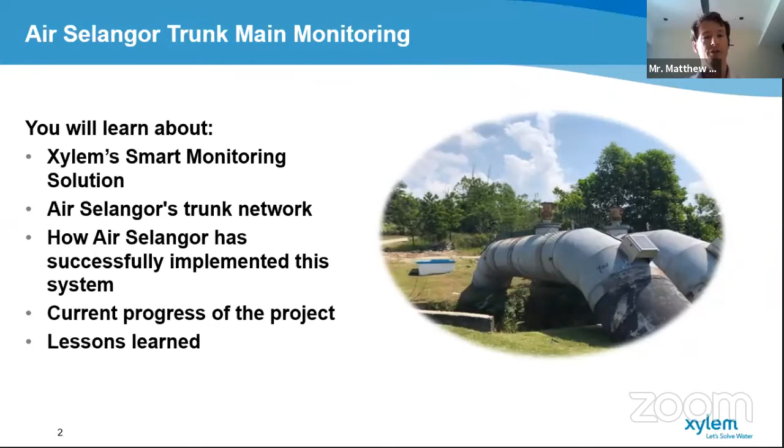So to initially take you through the solutions that we are providing here, Xylem provides a number of network analytics solutions relevant here. These cover 3 key products that we call View, LeakView, and SurgeView. The purpose of these products is to assist with decision support, NRW reporting.

24/7 leak monitoring and alerts, and asset failure prediction through the monitoring of damaging surges within the pipes. So these products are also supported by our own hardware, which you can see here. This constitutes a remote terminal unit, a pressure sensor, and an acoustic sensor. The RTU itself can also be used with flow meters and other types of sensors, and can be powered with a number of different power sources.

But the key part here is the pressure sensor, which is capable of recording up to 256 readings per second. This facilitates the transient monitoring that I've just mentioned. And the hydrophone also forms a key part of the solution here.

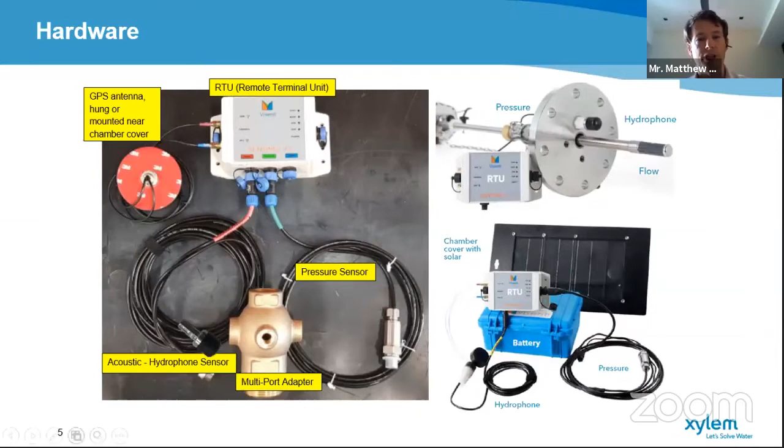So you can see this perhaps on the next slide. The hydrophones and the pressure sensors both form a key part of the solution. So when a burst occurs on a pipe, it can initiate very suddenly, resulting in a drop in pressure, which we refer to as a transient. This sudden drop in pressure can travel along the pipeline at high speed and for long distances, but can only be picked up with very high resolution recording of pressure. Typical pressure monitoring devices wouldn't detect this type of signal. So for this reason, we use the pressure sensors.

However, not all leaks occur as bursts. They may start small and grow over time. And these types of leaks might be recordable using hydrophones, which require closer spacing.

So by using, sorry, I need to interrupt you, I think we cannot hear you very well. You seem to be breaking up. I'm not sure if it's your internet connection or your speakers, try again. Just give me one minute.

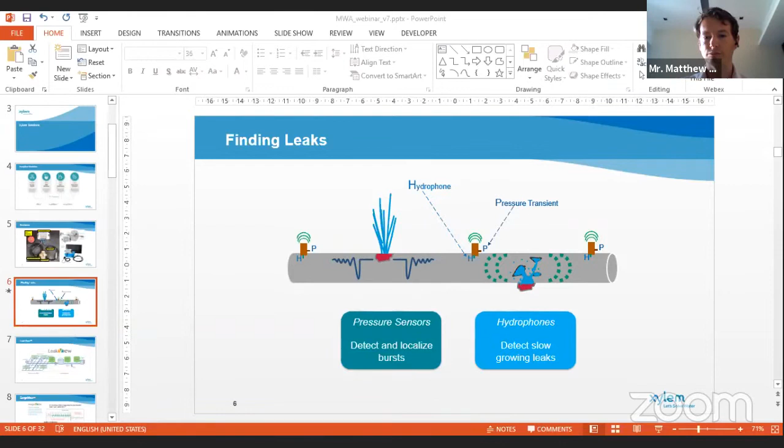Okay, can you hear me now? Yes, much better, thank you. Okay, please step in if I'm mumbling.

Okay, so to recap, we use those 2 different types of sensors, the pressure sensors and the hydrophones, to detect leaks in the different manners that they may occur on the pipes.

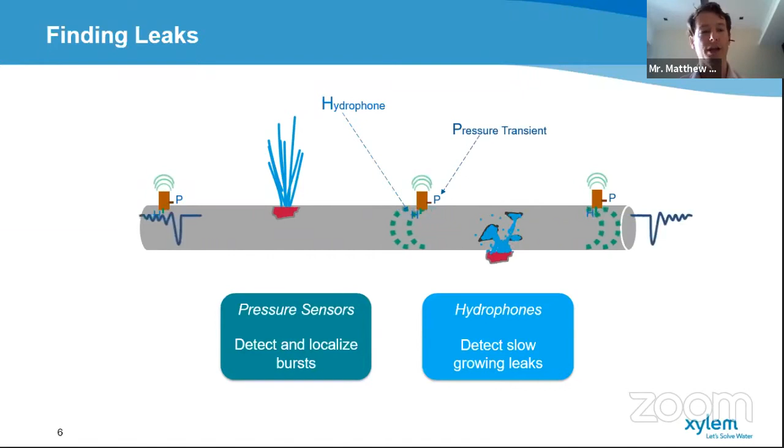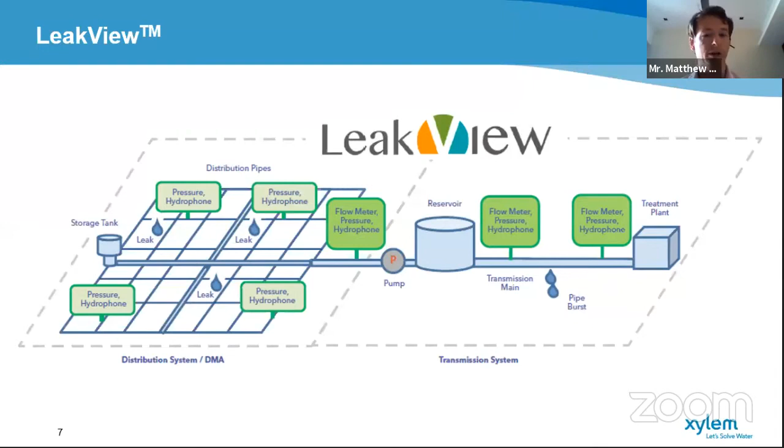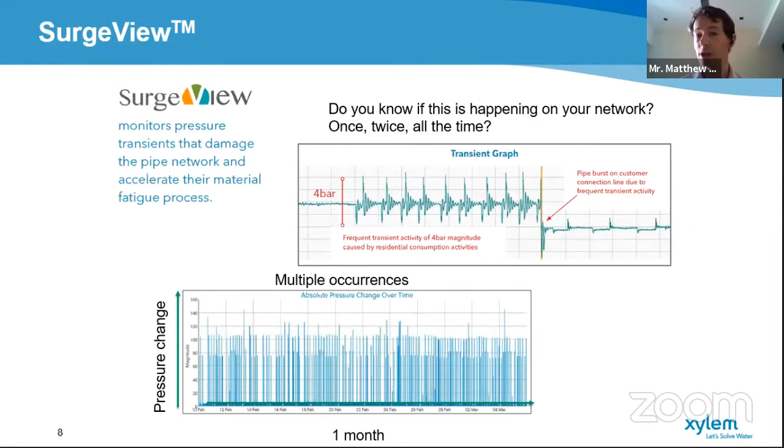The SurgeView solution that we're talking about monitors the pressure transients that I referred to on the network. So frequent occurrences of these pressure transients or excessive magnitudes of transient can introduce fatigue to your pipes, which over time may reduce the asset lifetime. It's important to identify these early on so that you can address the operational factors that may be causing them and increase the lifetime of your assets.

Both of these solutions are supported through our data analytics platform, View, which integrates data from multiple sensors or other platforms and runs network analytics on those data feeds. All of this can be presented through a system of flexible dashboards and reports to help you understand your data better and deal with the deluge of information that's coming in.

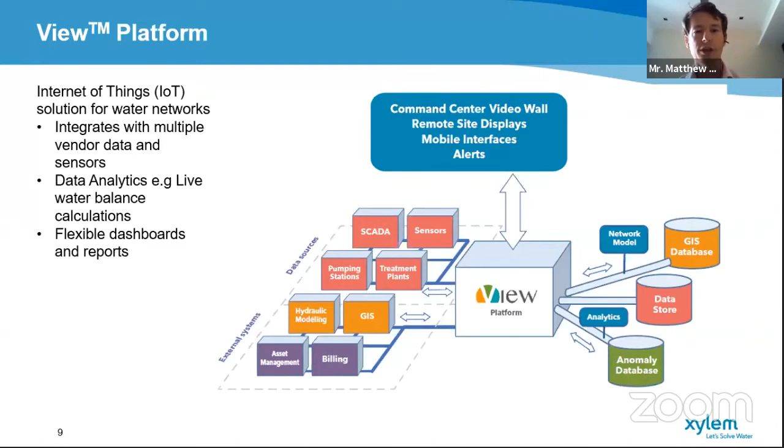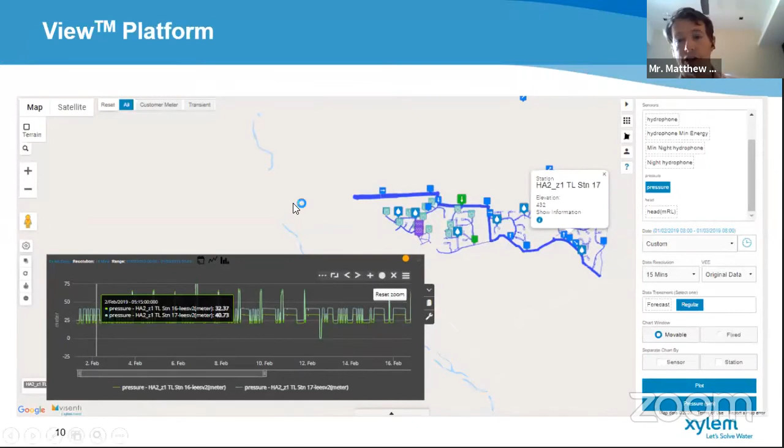So now I'll take you through a little bit on Selangor. Now, with you all being from Malaysia, I would expect you know where Selangor is, so I won't spend too long on this. But in terms of as a utility and their network, they're dealing with around 2.4 million customer accounts covering approximately 11 million people, the majority of that being domestic supply.

Now, from our point of interest, that's 28 or 29,000 kilometers of pipe, of which 6,200 kilometers are trunk mains, greater than 300 millimeters in diameter. The majority of those, 80% being mild steel in construction, although there is a mixture of other materials, including ductile iron and asbestos cement across that part of the network.

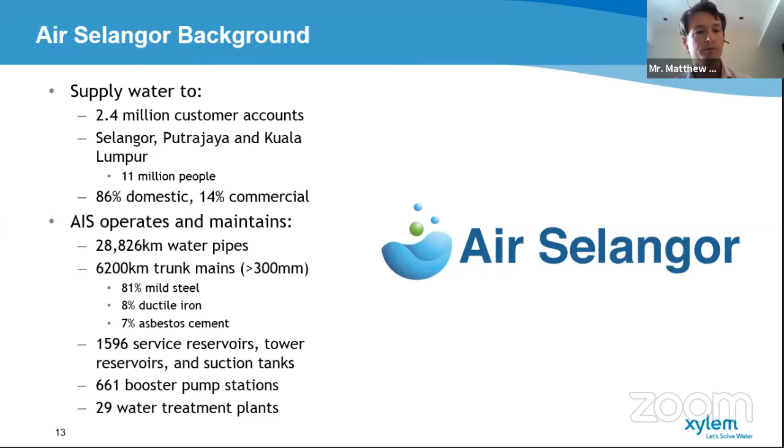Selangor have had a stated aim to reduce their high rate of non-revenue water. In January 2018, this stood at 31%, and I know they've had some success in reducing that in recent years. That's been made up of quite a number of leaks and bursts every day. The goal has always been to reduce the runtime of these leaks and bursts and therefore reduce the volume of water lost, and to be able to pinpoint the location of these pipe failures.

Similarly, from a proactive perspective, it's important to them to identify the causes of these pressure surges and mitigate them before they cause the pipes to burst.

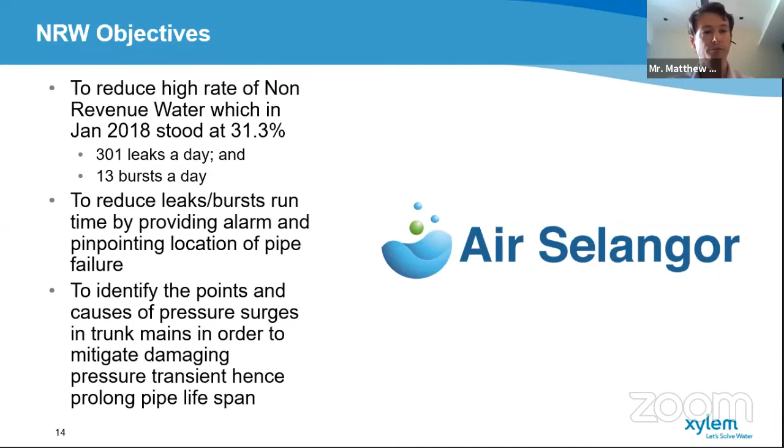So Selangor managed this with a three-pronged approach. They have a passive network, a call center to pick up customer notifications or leak notifications across the state, and that would be the passive approach. But they do have a proactive approach of line sweeping with technologies such as ground microphones, listening sticks, and acoustic correlators. Supplementing this is the Xylem system, which provides both a proactive and a reactive solution to be able to detect leaks before they occur and react to them as quickly as possible when they are detected.

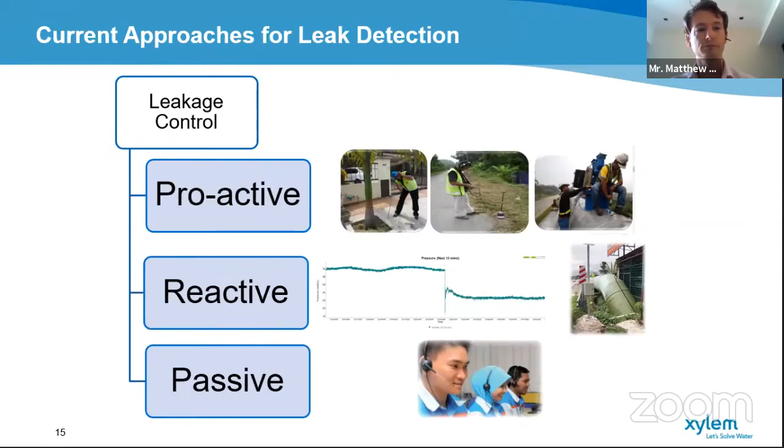So why trunk mains in particular? Active leak management can prevent costly shutdowns of the network. Since trunk mains convey a lot of water, it's important to keep them running all the time to avoid shutdowns to large numbers of customers. They are the backbone of the network.

In particular, in Malaysia, these trunk mains can be in remote and infrequently visited areas. So often you may rely on the public to inform you of leaks. Not really possible when these are in plantations or in the jungle.

Not every leak is like the one you can see in the picture here, which could be seen from a long way off. Quite often they're hidden underground and very rarely visible. The large pipes that you can see in the picture here are not always suitable for leak sounding with equipment such as correlators and microphones. They're hard to access, and when they do burst, you can have very high leak rates.

Similarly, from the proactive perspective, they are also subject to large operational pressure transients, as they're usually part of the pumping network that you all have.

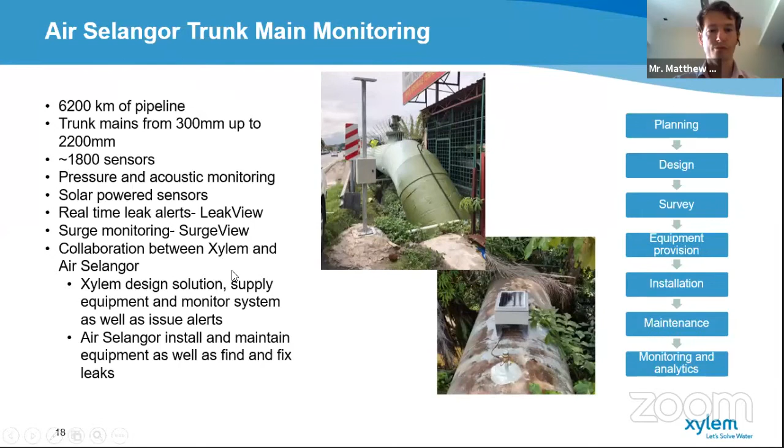So we have several types of deployment that enable us to speed up the deployment of the equipment in the field. They're all solar powered. You can see in the pictures a typical deployment fitted to a steel pole, and another type welded to the trunk mains in the lower left-hand image. All of this is powered with a rechargeable battery inside the enclosure. We refer to these as both pole-mounted and bracket-mounted types of deployment, enabling us to go into both chambers and on the S-bends typical within Malaysia.

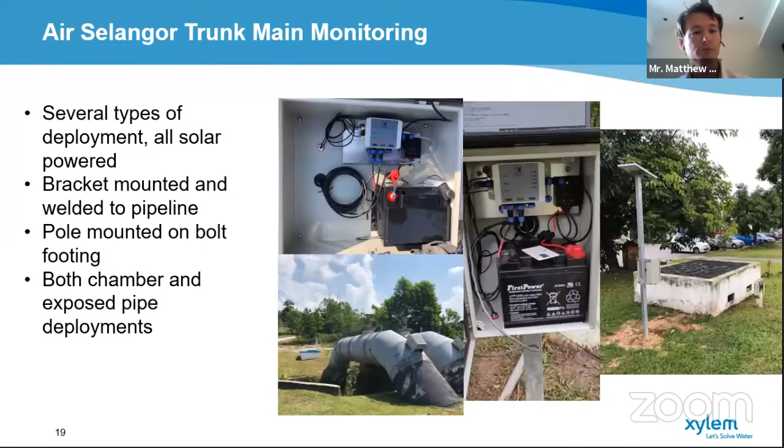So at this time, the current status of the project, even with the MCO slowing things down, we're at around 1,300 sensors currently deployed, with around 80 going in every month. That's covering approximately 250 pipelines across the state and enables us to detect around 4 leaks per week. Some weeks we have 7, which is a leak a day; some weeks we have a little less. As we install more sensors, this is steadily going up. A year ago, with fewer sensors installed, we were detecting around 1 leak per week.

Now, what that means is those sensors have accumulated 500,000 days of operation, and that generates a lot of data. I mentioned the 256 pressure readings per second - well, that's 2.5 trillion pressure readings, 7 million acoustic recordings. This is way more data than a human being could ever hope to look at, let alone comprehend what this looks like on a piece of paper.

So this is the benefit of the real-time detection algorithms that we have, which have enabled us to identify 170 leaks in 2019. All of these have been fixed and repaired. It's a key benefit to Selangor's leak reduction strategy.

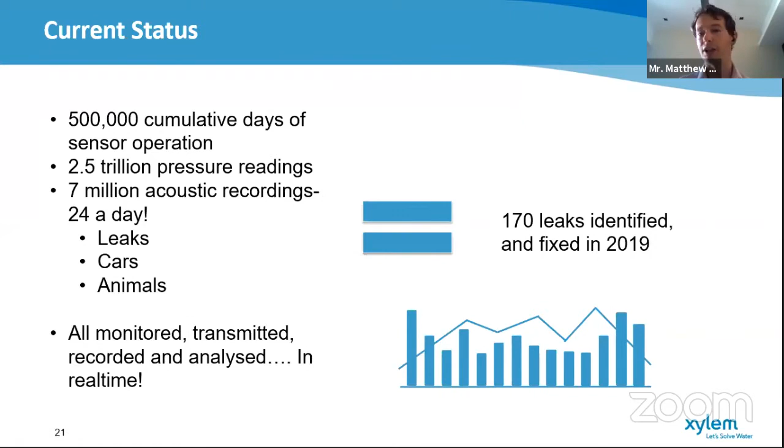So the successes of this type of deployment - we've managed to have a standard design that applies to most of the varied situations across Selangor. This has enabled rapid deployment so that we can go from 0 to several thousand sensors relatively quickly. We've managed to locally source a good portion of that equipment, which helps speed up the deployment. And some other key benefits in terms of the monitoring of the system.

The response times that we have are often before the public are aware of a leak. So if a burst is occurring, we have many cases where the alert our system generates is before the public are aware that the pipe has burst, reducing the runtime of those leaks. With the hydrophones, we're able to pick up the smaller leaks before they burst, which again reduces the runtime of them from weeks or months down to days.

And should those leaks reoccur - if you have a particularly degraded section of pipe with leaks occurring one one day, another the next week - even after the first leak is repaired, the system is there to pick up the second, third, or fourth leaks. So it's really good for picking up leakage and keeping it down. We also have a good awareness of leaks occurring beyond the project pipelines that were installed upon - even though we're on the trunk mains, some of the connected areas we're capable of picking up leaks in.

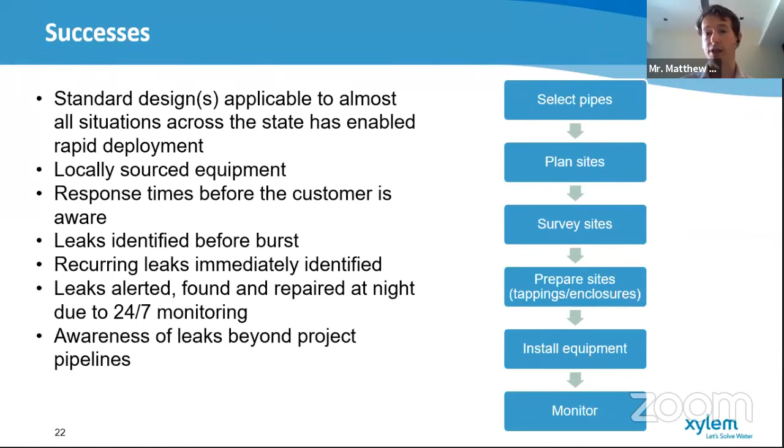Now, any project wouldn't also be without its challenges. Malaysia does introduce some unique challenges, which I'll get onto down below. But one of the key points I've alluded to is the coordination required for this quantity of sensors and the quantity of data coming in. This leads to communication challenges that need to be overcome. As a utility, Selangor will have gone from no leak alerts to hundreds of alerts just because of the network that has been installed.

And finding a way to ensure that the leak detection teams can address those is very important to get over when running a project like this.

It's also a new technology, so education and appreciation of how the system works is key at the beginning of any project like this. Training is required to bring staff up to an understanding of what the sensors can do and the benefits and constraints of the system.

Now, from a Malaysian perspective, we have faced a few issues with the sensors themselves, both in terms of theft. You can see there that everything but the kitchen sink has disappeared out of that enclosure.

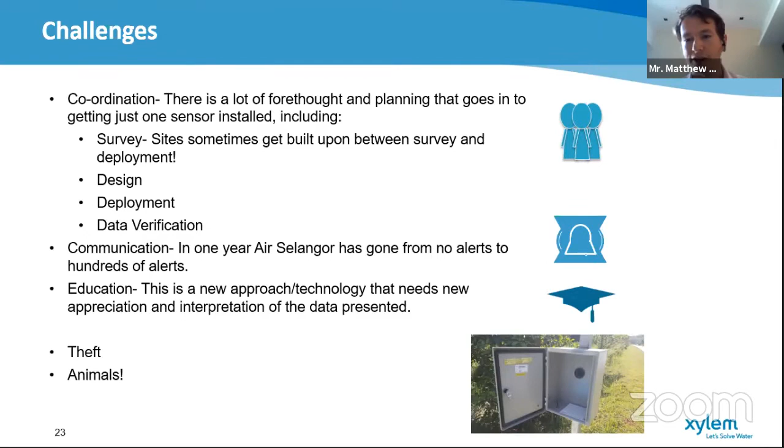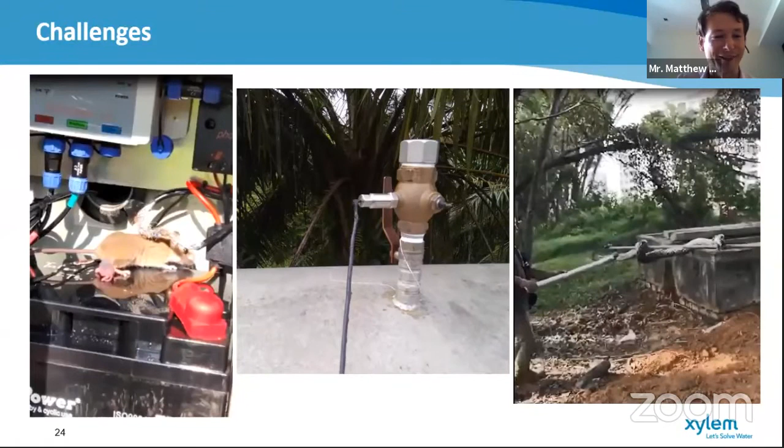So what have we learned from all of this data that's coming in and the monitoring networks that we've installed? The pressure transients, an example of which you can see at the top right here, these can travel a long way, up to 30 kilometers, and they may be present before a leak fully surfaces. It may not be visible above ground, but the burst transient may have occurred on the network before the leak surfaces. So you do get a good bit of lead time even with the bursts by using this type of system.

We've also found with the acoustics that typically with hydrophones, the expectation is that they can pick up leaks within a distance of around 500 meters. What we find with this type of system is that leaks of certain sizes can generate additional flow on the pipeline. And the sound of this flow in the pipeline through fittings can be picked up at a much larger distance. So I'll show you an example of this a little later on.

Another important point about this system is that not every leak produces a pressure transient. Not every leak produces a clear acoustic signal. So it's important that we use multiple parameters to maximize our chance of detecting leaks on the network. Just pressure sensors or just acoustic sensors will only pick up a certain subset of what is occurring.

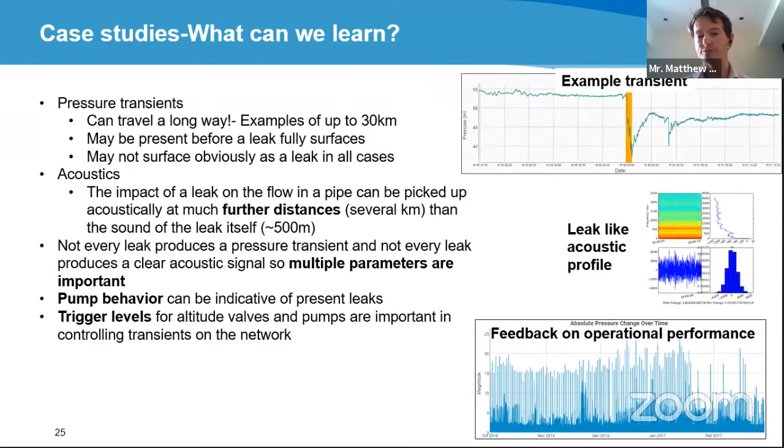So I'll take you through some specific cases we have for some of this. This example here was a particularly large leak that was detected. And if we were monitoring the network with a standard set of pressure loggers or at our balancing tanks, we might have some alerts set up so that when the level in the balancing tank goes below a certain threshold, we may trigger an alert for a low pressure.

Now, on the center graph that you see here, the green line is pressure. That type of alert at the balancing tank may only get triggered somewhere within the red circle after pressure has dropped out of its typical daily range. By using the transient sensors, what we've been able to do is identify the presence of this leak a full 6 to 12 hours before that type of monitoring would have picked it up.

So in the graph at the bottom, we can see the high resolution pressure data. There is a 6-meter, very sudden drop in pressure at 10:45, the night before the leak was found. And then a few hours after this, another 11-meter drop in pressure at 3 a.m. in the morning. On the middle graph, you might also be able to see some light blue lines.

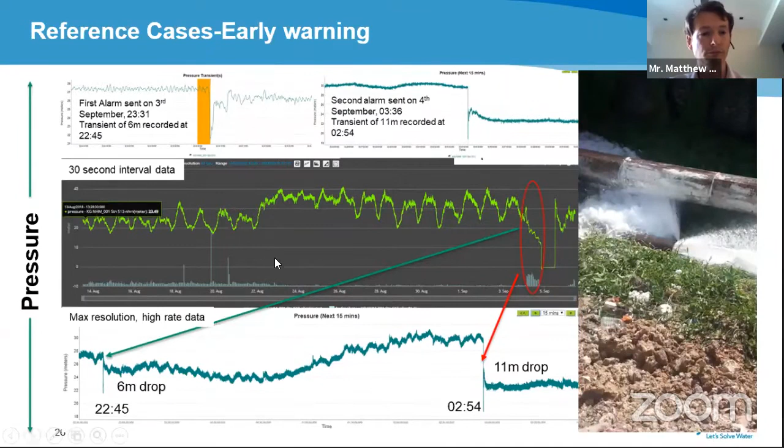So here's another example. This case study shows being able to detect leaks that may not have surfaced from a greater distance than we typically have with acoustic sensors. In this particular case, we had a 900mm mild steel pipe, and the leak occurred 1.5 kilometers from our sensor. It was a very large leak, 20 liters per second.

You can see in the picture here, but this is only after excavation. The leak itself was flowing directly into a nearby river. It was not visible from the roadside, and it was not in an area where people would call this in.

On the graph below, you can see the green lines, which are showing the acoustic energy being recorded. These suddenly increased around the 28th of April, and that increase in energy was indicative of the leak. Following the repairs, that energy dropped back down again. So it was important using this sensor to be able to pick it up at both an unusually large distance and with a buried leak that did not surface. This is because we were able to pick up the sound of the flow within the pipe as a result of the leak.

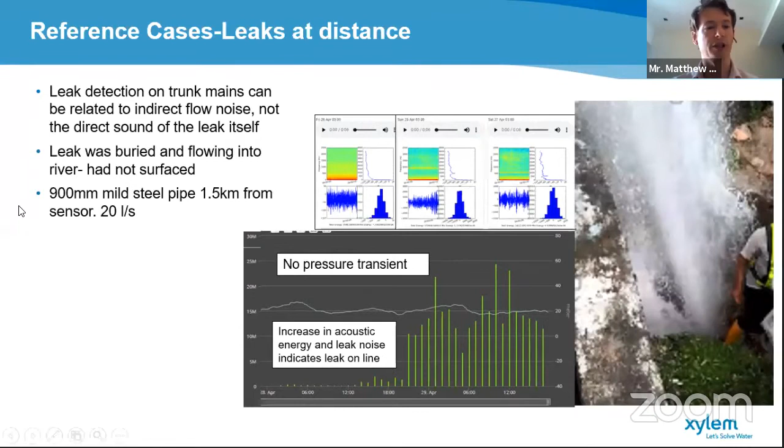A third case study I've got here, I referenced how pumps may be indicative of leaks on the network. In this particular case, we can see the red line on the chart. There's a daily pumping pattern that's going on.

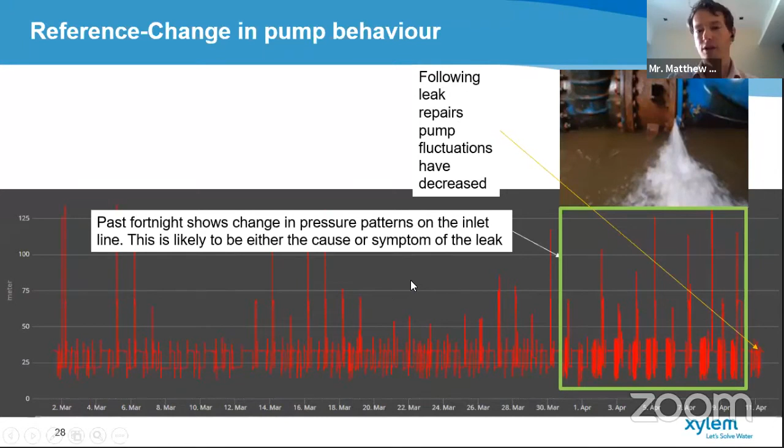Towards the right-hand side of the chart, we can see that the line gets blurry. The pumps are turning on and off more and more frequently. This is because they're trying to pump more water as a result of extra demand caused by a leak. We can see on the far right-hand side of the graph that after the leak was repaired, the pump frequency returned back to normal. So this is an indication of pumps showing the presence of a leak.

But one of the key aspects of the system is using the high rate pressure, the pressure transient data, to determine if the pumps or other network assets may be damaging the pipelines before the leaks occur. So using this method, we've identified over 20 operational issues across the network. They're relating to pumps, valves, or unusual demand patterns.

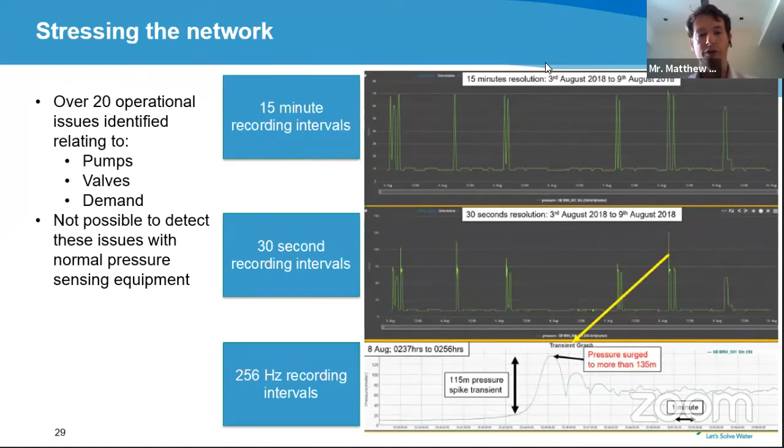So here are some examples of some of those issues that we pick up using this method. We may have overactive pumps where they are triggering too frequently, on and off every few minutes. This might also apply to valves, altitude valves on the network, where these can be fluctuating every few seconds, open and shut, open and shut. This introduces a cyclic loading to your pipes, which may introduce damage.

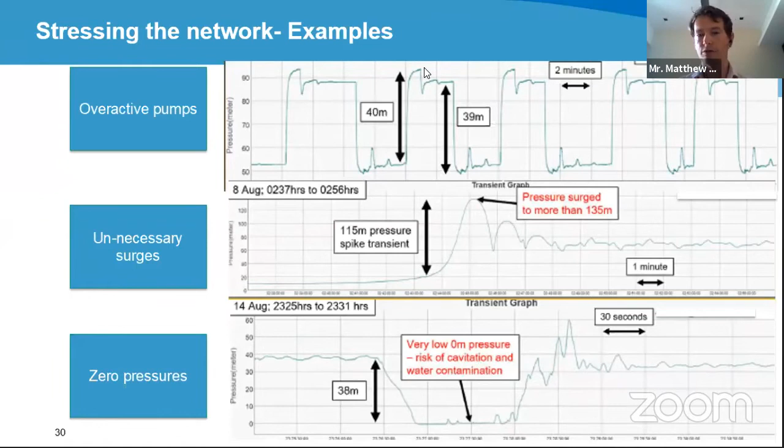The bottom graph, we can see an example of potential cavitation on the network. So when we're opening and closing valves, turning pumps on and off, we may get some very short periods of zero or below zero pressure, which is particularly damaging to pipes. We wouldn't pick this up with the low rate pressure sensors, the 5 or 15-minute readings of pressure. So the zero pressures are also being picked up by our system.

So that's been a quick run through of some of the issues that we've faced on the network and how we've implemented the solution for Air Selangor.

So some take-home messages from that in terms of conclusions: we've been able to show that we can provide an early warning and reduce leak runtime. We can identify recurring leaks, so we can identify the source of NRW and keep it down. We can use multiple sensor feeds to identify the leaks rather than just one or two, acoustic or pressure. And we're able to identify the causes of leakage to prevent further loss.

So this is a very proactive method of leak detection. The system we're using effectively complements the existing leak detection methods that Selangor have, so we're able to trigger further surveys in the field if there is a particularly difficult leak to find. In sum, we've been successful in setting up the monitoring system on Selangor's trunk mains, and we're looking forward to continuing to install and monitor on them over the coming years.